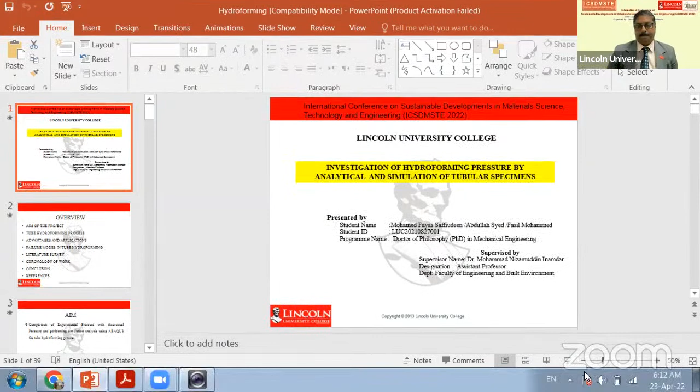The title of the paper is Investigation of Hydroforming Pressure by Analytical and Simulation of Tubular Specimen.

In this presentation overview, we are going to see what is the aim of this project, then the main title, tube hydroforming, what is tube hydroforming, its advantages and applications, and what are the failure modes. After that, literature review, then chronology of the works we have done: experimental calculation, theoretical calculation, and Abaqus analysis work, then conclusions.

So the main aim of the research is comparison of experimental pressure with theoretical pressure and to perform simulation using Abaqus software for a tube hydroforming process.

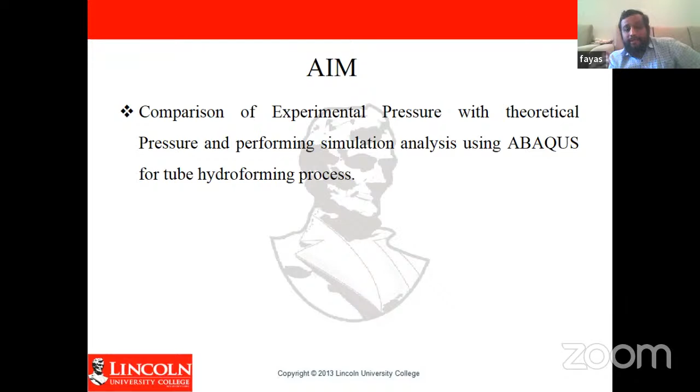This project is fully based on tube hydroforming. We did tube hydroforming for 3 different types of materials. We manually calculated the theoretical pressure using formula, then we did experimentation, then we did simulation, and we compared all these 3 pressures.

The objective of the research is comparing the theoretical and experimental pressure of deforming of components, and to carry out the analysis of the tube hydroforming process in Abaqus. This hydroforming is only for tube, not flat materials, only circular tube materials. We are also investigating the axial displacement of the tubular materials. After that, we did annealing also, and a comparative study of normal and annealed tube materials. We compared 3 materials: aluminum, brass, and copper.

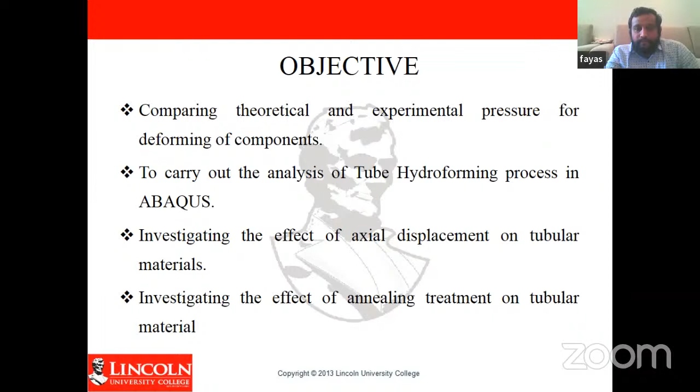This is the simple definition for hydroforming: it's a method of deforming sheet metals and tubular materials with the help of pressurized fluid medium. We will get the bulged material using closed dies. This is the simple process.

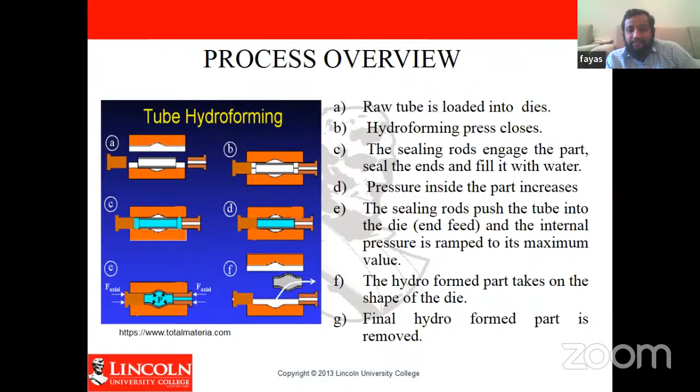For example, in picture A, the raw tube material is loaded into the dies. Then we close the press, the sealing rod is engaged, and the pressure inside the fluid medium was water. Once we give the axial displacement, that means pressure, we get the hydroformed components.

What is the advantage of this hydroforming? The important thing is there will be no welding activity to get the bulge material, so there will be no NDT and no defects. This is mainly for lightweight construction, and there will be no tool cost. Flexibility will increase, and different types of shapes can be created. Not only bulge material — this project creates only bulge material — but depending upon the die, we can create as many shapes.

These are some applications of tube hydroforming. It is mainly used in automobile and aerospace industries, more than that, bicycle frames, metallic bellows, some local components like elbow, T, and piping components — some companies are producing these.

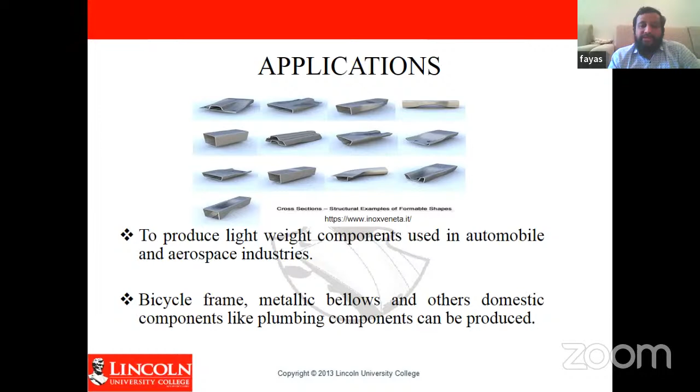These are all the general failure modes: bursting, wrinkling, buckling, folding back. Bursting happens due to excessive circumferential stress, and wrinkling happens due to axial compressive stress from end feed.

Buckling happens only at the initial point, the starting of the operation, due to high force. If you cannot directly give high force, we give step-by-step pressure; if you apply more force, you will get buckling. Then folding back happens after wrinkling — they combine together. If you apply excessive axial load, you get wrinkling, and after that you get folding back.

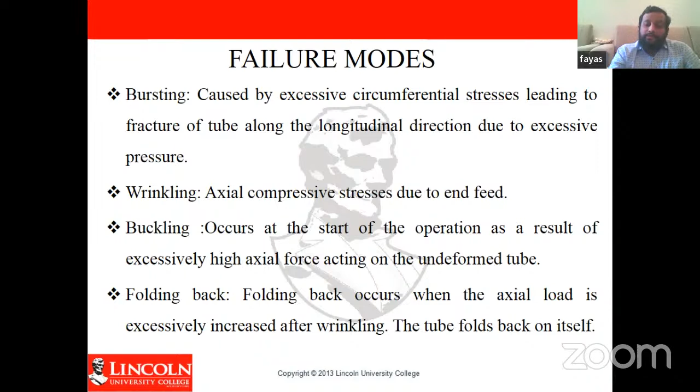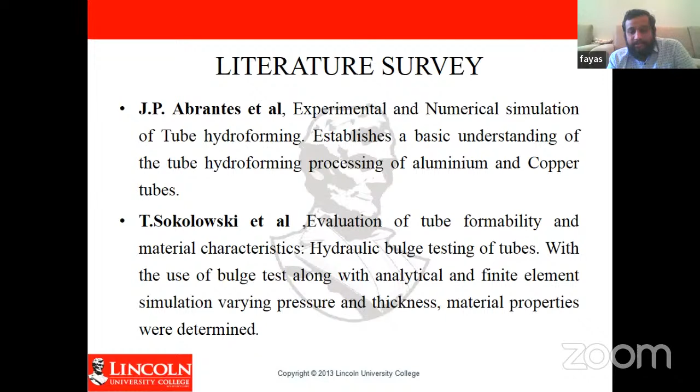These are the literature review. The first paper, by J.P. Abrantes et al., compared experimental and numerical simulation of hydroforming for aluminum and copper. The second paper evaluated tube formability using a bulge test — that's the only difference, and he didn't do experimental pressure, only analytical and finite element simulations. The third paper discussed a single-step tube hydroforming process, not multi-step.

The fourth paper, done by one of my colleagues, did tube hydroforming followed by annealing. The annealing temperatures for aluminum, brass, and copper were 413, 540, and 520 respectively. We have also taken the same temperatures for our project.

The last paper used finite element modeling and finite element analysis only in ANSYS. But the important thing he did was simulation in 5 bases — depending on how much pressure was given, he did multi-stage deformation. That's the important thing in this one.

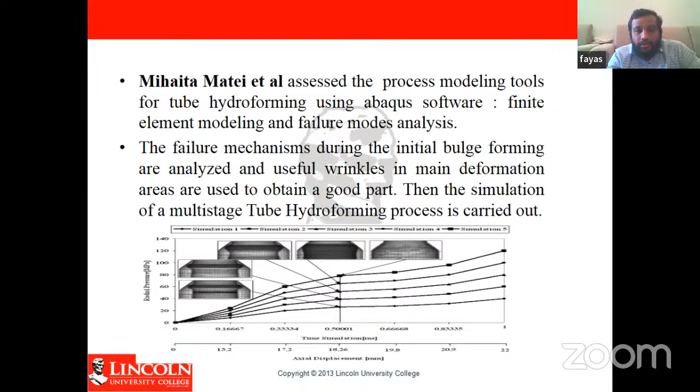The seventh paper described design and development of hydroforming for a long SUV frame. The next paper, by Ahmetoglu et al., summarized work using low carbon steel and aluminum alloys. The last paper presented theoretical analysis and numerical simulation to avoid wrinkling behavior — only that one defect was analyzed, focusing on how to control and use wrinkles.

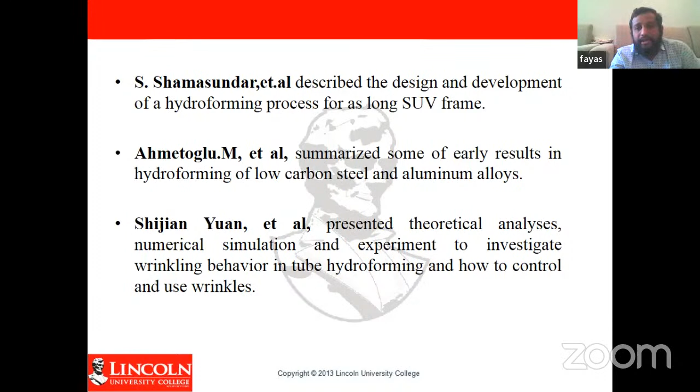So the first step of the process is calculation of theoretical pressure.

This is the formula. The important point is we have to find the strength coefficient K and strain hardening exponent N. The formula is: stress equals strength coefficient times true strain to the power N. The N value we will get from the stress strain curve.

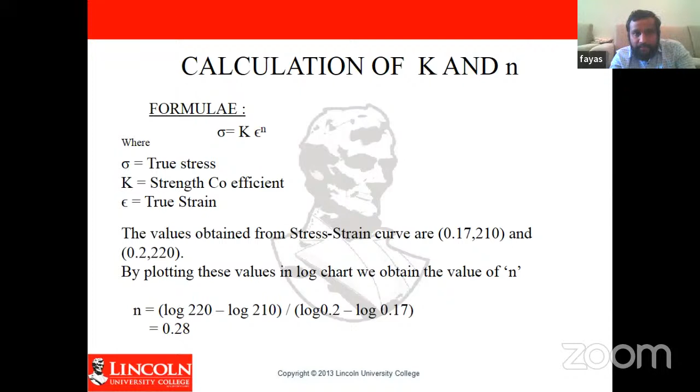This is the calculation for aluminum. We have given detailed calculation only for aluminum. So for aluminum, we got theoretical pressure as 13.6 Newton per millimeter square.

The same formula is applicable to brass, only the numbers vary. For brass, we got theoretical pressure 23.78. For copper, we got 25.64. This is only for theoretical pressure.

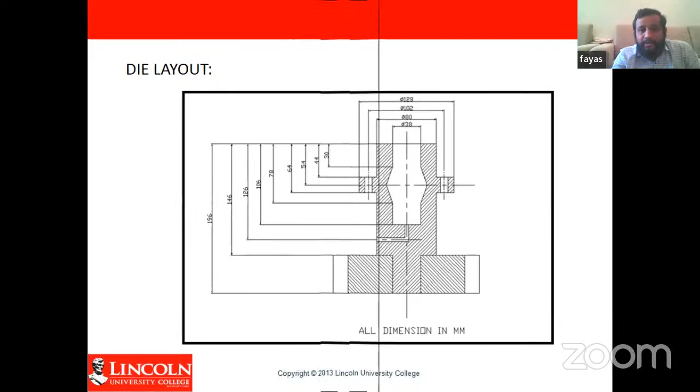So the specimen is brass. What we have done is this is the top die and bottom die. Inside this one, we will control the pressure and extrusion.

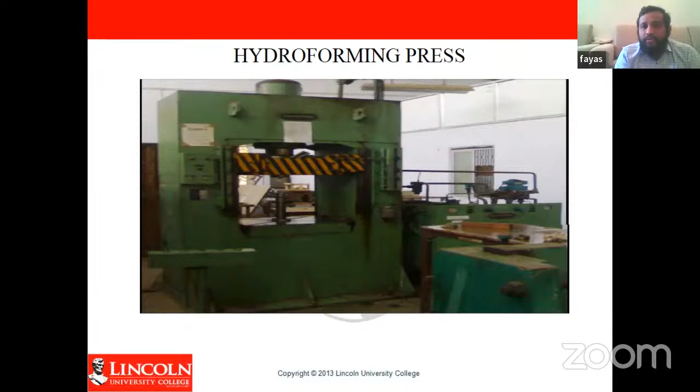Continuing, this is the hydroforming process. We changed the tool setup, same as what we have shown. From this setup we did the process. Our diameter of the tube is 38 millimeter, thickness is 1.5 mm. First we did a trial at 30 millimeter feed.

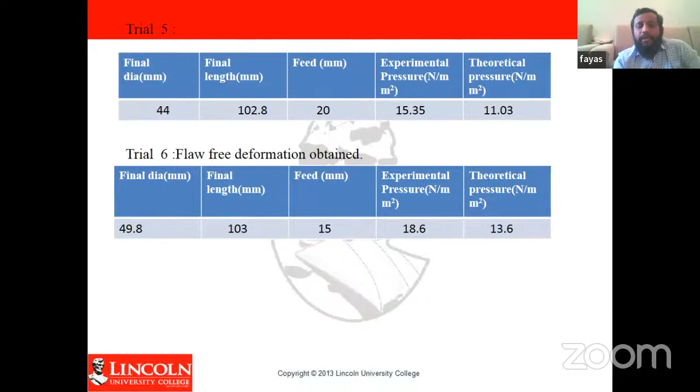Trial 1 failed. Trial 2, trial 3, trial 4, each time we changed different feed: 30, then 25, then 20, and 15. At final, we got it at 15 feed, a flaw-free result without any crack or buckling. We got it in trial 6.

Then for brass, we got it at 20 millimeter feed, at trial 2. Copper also we got at 20 millimeter feed, at the second trial.

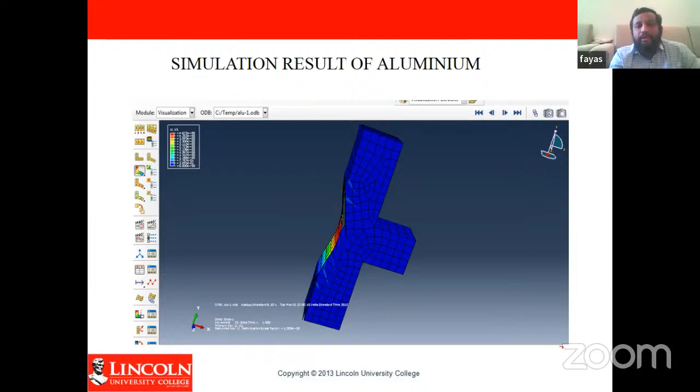Then this is a simulation thing, we did it in Abaqus. We did all the pre-processing and post-processing. This is only the final results of aluminum, brass, and copper. We noted down the value. This is the experiment results for aluminum, brass, and copper.

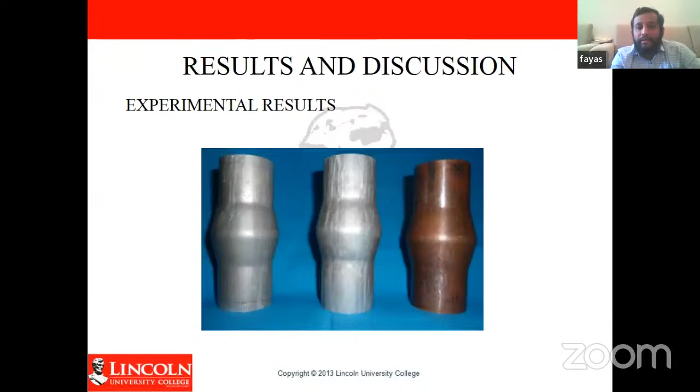Abaqus result is 23, 30, 35. Experimental result is 18, 23, and 21. So all the numerical simulation was conducted in Abaqus and compared with theoretical, and all are quite reliable.

Then for annealing, we did annealing as noted in the literature of the paper: 470, 520, 540 degrees Celsius. The specimen shows good deformability compared to without heat treatment.

So the conclusion of the project is theoretical pressure was evaluated and compared to experimental pressure. Brass is closer to copper, and the pressure developed for the required bulge is highest for brass compared to copper and aluminum.

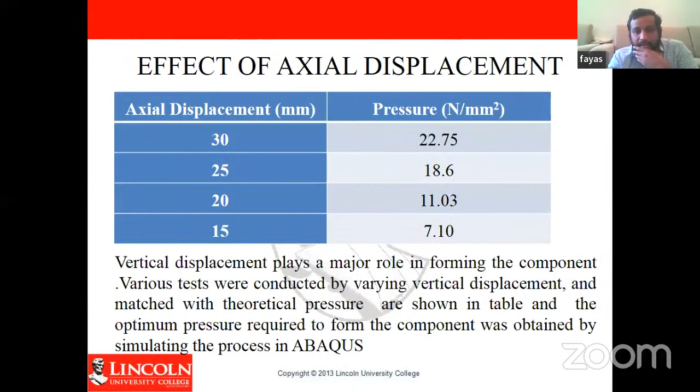If you see the numbers, brass is the highest one, 30 Newton per millimeter. For everything, all three materials, brass is the highest number.

Then the influence of annealing improves the formability of the tubular materials. And axial displacement of the punch increase helps the formability of the components. Bulging diameter obtained from experiment results and simulation analysis are almost closer.

So these are all the references.

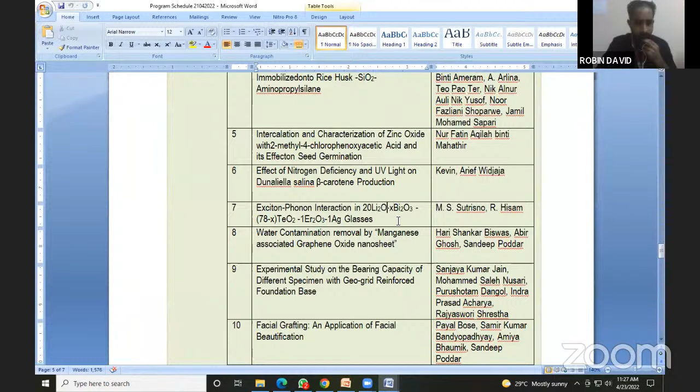So can I share my slide? Yes, please. Wait. Just to inform, as there are 5 missing, we are bringing some post-lunch session papers before this. Does that be clear? Ready as per I gave the chat box. Does it... yes, clear, your slide is visible. Okay, thank you, good, please. So then I can start. Good morning to all, to the chairperson, and also all audience. Today I will present on the exciton phonon interaction in lithium bismuth telluride erbium silver glasses. My name is Muhammad Siddiq Fadil bin Sutrisno from the University Technology Mara.

So this is the content. First we will go on the introduction, methodology, result discussion, and also conclusion. For the introduction, first is regarding the exciton phonon coupling. This is in the area of semiconductors, so we have the term band gap. For the electronic excitation to excite from the valence band to conduction band, we have some factors that assist the electronic excitation. One of them is the formation of electron hole pair formation that we call an exciton, bounded between the band gap. Example here, you can see the exciton, it is bounded between the band gap. So whenever it is bounded and trapped by the band gap, we need some energy transfer that can make it come out from the trapped condition. So what can help this exciton to get out from its bounded state? It is the phonon.

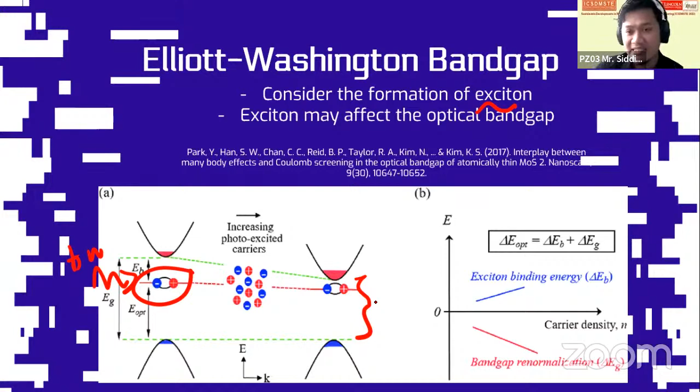So from our research, we get the same, actually consistent, same energy that is also consistent with the previous reported literature.

Increasing of disorderness parameter actually indicates increase in disorderness of the glass network. Whenever the disorderness of the glass - we know glass is famous for its disorderness - so it is due to the role of bismuth as glass modifier that will create the defect.

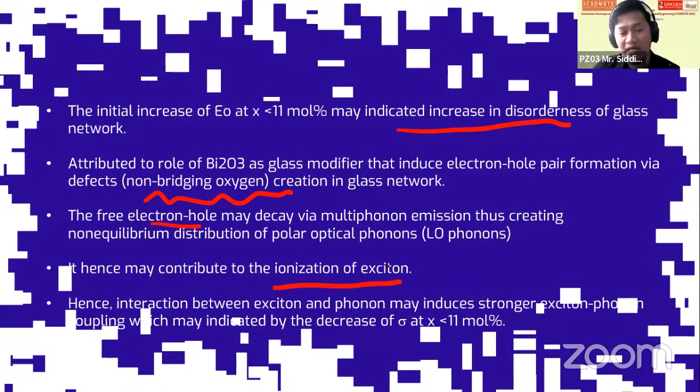So whenever we have a defect, then it will create a free electron hole formation. The free electron hole formation will decay via multi-phonon emission. The multi-phonon emission will help the ionization of exciton. So whenever the exciton is ionized, then we can have the strong exciton phonon coupling at this region.

So you can see from here, whenever the exciton phonon coupling is increasing and we have the strong exciton phonon coupling at the region before 11 mol%, we can say that we can also have the reducement, the decrease in terms of energy band gap.

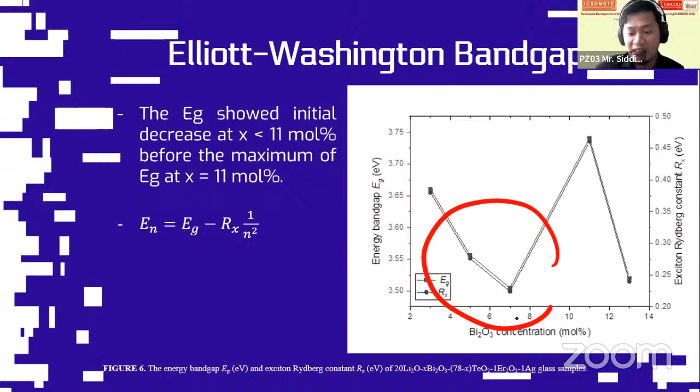So from this we can conclude that actually the exciton phonon coupling, whenever we have the strong exciton phonon coupling at some position, then it can help also reduce the energy band gap. So it is actually good news to us because we can find one way to reduce the band gap of a material, especially in the glass field.

So you can see from here that the reducement in terms of band gap is actually coincided with decrease in exciton binding energy. So it actually indicates the easier dissociation of exciton, or ionization of exciton. It is from the energy transfer from the multi-phonon.

So the energy that the exciton gets from the phonon will help the dissociation of exciton overcome its binding energy. Then the exciton will assist the electron excitation as a free carrier, thereby reducing the energy band gap. So then it needs lower energy only to do the electron excitation from the valence band to the conduction band.

So in conclusion, you can see from here, first we do our glass sample and examine its optical absorption properties, and then we calculate its disorderness parameter for all glass samples. And then after that we also analyze our absorption coefficient data by using the Elliott-Washington model, because this model considers the electron hole formation, the formation of exciton, and also the exciton phonon coupling in our optical band gap determination.

So, and we can get also the result. So that's the end of my presentation. Thank you.

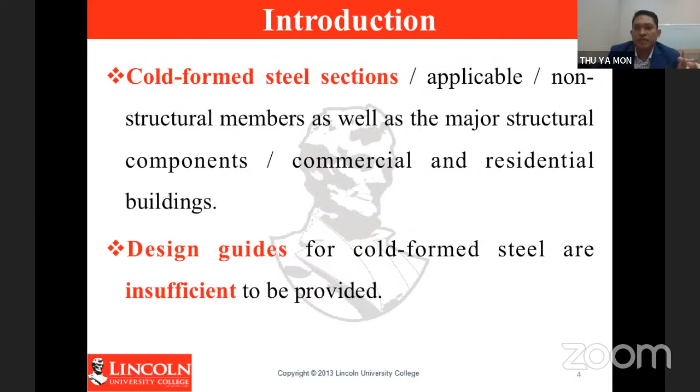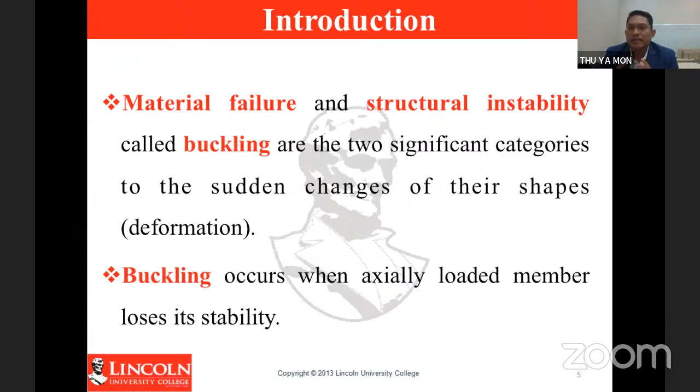The sudden changes of cold-formed members are called deformations, which have two influencing factors: material failure and buckling. Buckling means when an axially loaded member loses stability, and it generally occurs within the elastic range of the materials.

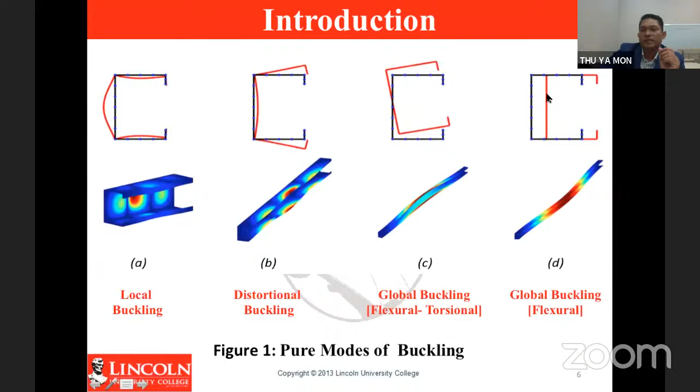In figure C, both rotation and translation of the whole member occur, which is called flexural-torsional buckling. In figure D, we see only translation of the member, called flexural buckling. The main purpose of this study is to investigate the buckling behaviors and bolt-welded connections of the back-to-back built-up built-up stud columns.

Stud column means short columns, and a compression test. For this purpose, I used 18 specimens in two groups: group A and group B. In group A, I used 9 specimens with end plates, and in group B, I used 9 specimens without end plates.

In section 2, experiment investigation, figure 2 shows the geometry of the specimens used in my experiments. On my left side is a specimen from group A with end plate, and on my right side is a specimen from group B without end plate.

Here we can see the red color, representing the welded joint connection of the back-to-back built-up column. There are 3 types of weld spacings: 509.6 millimeters, 204.8 millimeters, and 77.4 millimeters.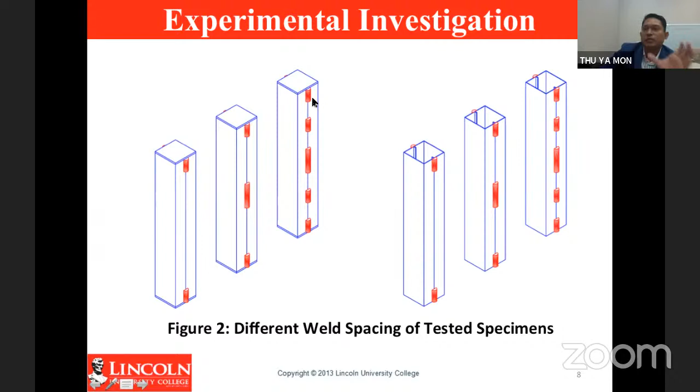Based on this, I focus on which welding type connection will be best for the back-to-back built-up connection, and what will be their buckling mode.

So for section 3, the test procedure and results. In my experiments, I have used a universal testing machine with a maximum compressive load of 1,000 kilonewtons. The testing procedure and method are according to ISO 6892 / JIS Z2248.

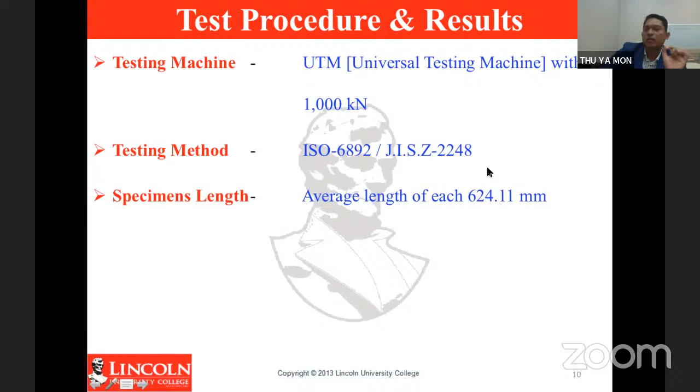For the fabrication of the tested specimen, because of geometric imperfection, the average length of the tested specimen is 624.11 millimeters. The specimens are welded using arc welding, jointed face-to-face with fillet weld connections. The weld spacing, as mentioned before, ranges from 77.4 millimeter to 509.6 millimeter. The welded electrode used is J3812 E6013, at room temperature.

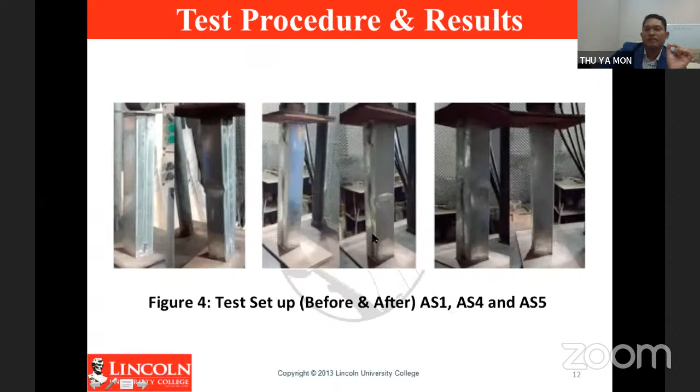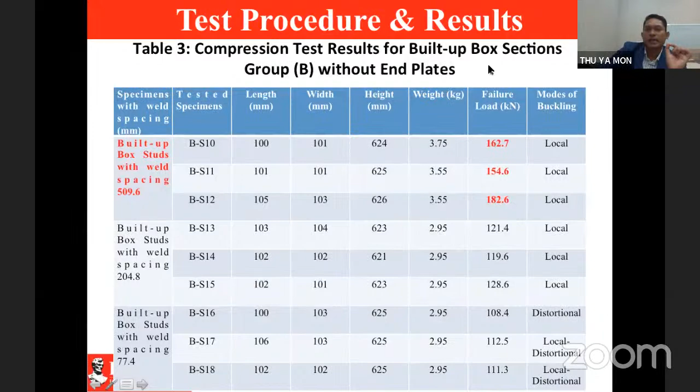For section 4, discussion: based on my experiment, the weld spacing of 509.6 millimeter sustained the largest failure load of 180.4 kilonewtons in group A and 166.63 kilonewton in group B.

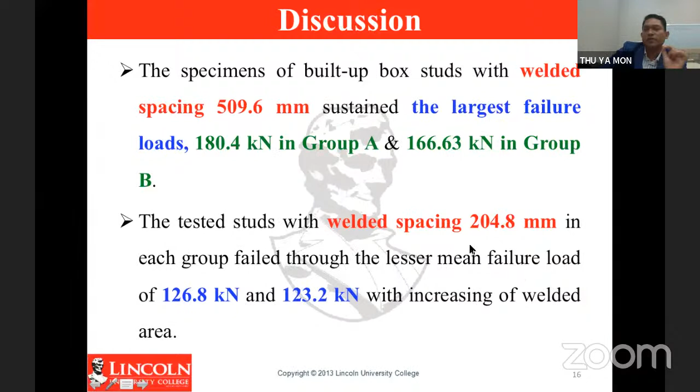Once the weld spacing decreased from 509.6 millimeter to 204.8 millimeter, we can see changes in the failure load, ranging from 180.4 kilonewton to 126.8 kilonewton in group A, and 166.63 kilonewton to 123.2 kilonewton in group B. This shows that decreasing the weld spacing reduced the failure load.

From this experiment, it demonstrates that the best weld connection spacing for the built-up box is 509.6 millimeter, and it is recommended that unnecessary welded area reduces the strength for bearing load capacity.

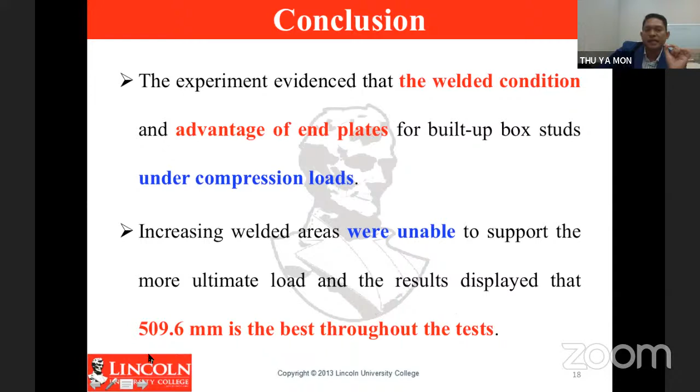For conclusions, this experiment shows evidence that welded connections and the use of end plates provide advantages for the built-up box column under compression loads. Also, the increase in weld area was unable to support more ultimate load, and the results show that 509.6 millimeter is the best spacing of the test.

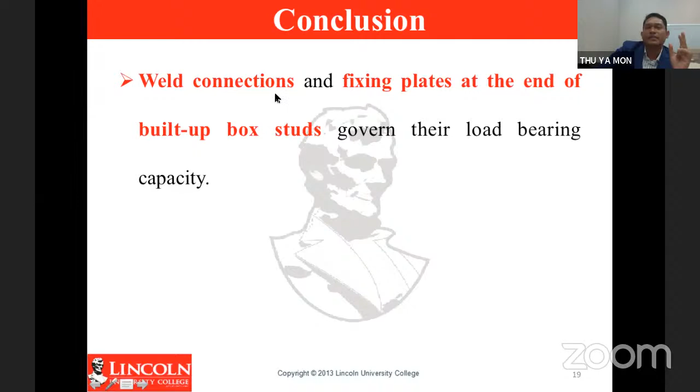These experiments demonstrate two factors that govern load bearing capacity: welded connections and the application of fixing plates at the ends of the built-up box studs. Throughout the experiment, there was no occurrence of overall or global buckling mode. Finally, it is recommended to use these experiment results together with analytical and numerical approaches to be more reliable in design evaluation.

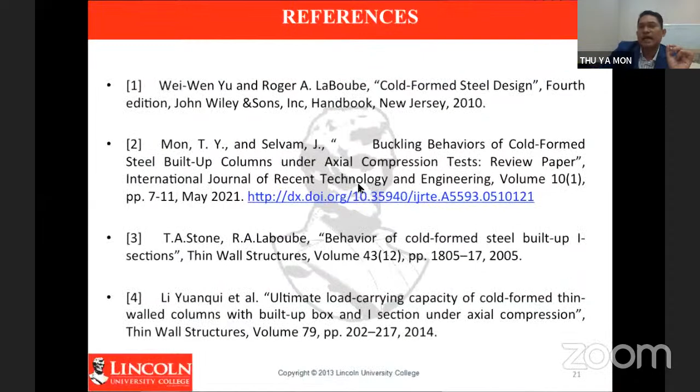Thank you, sir, for your excellent presentation. Carry on, okay ma'am. Any queries from the participant side?

So I have one concern: what is the need to study this buckling behavior of the materials? Why exactly are you studying about it?

Because in the construction industry, cold-formed steel members are used only as non-structural members. But in future, we hope to use this material in place of structural members. If we can substitute this material in place of hot rolled steel members, there are many advantages for the environment, for construction technologies, and also for construction costs. That's why we are focusing on how to use this member as structural components, like beams and columns, in building construction.

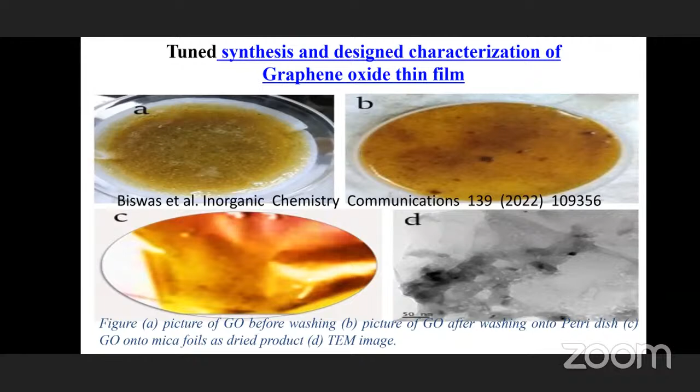Picture A is the raw picture of graphene oxide before washing by ethanol, and picture B is after washing on the petri dish, and C is the dried condition product on mica foil. Picture D is the TEM image of the graphene oxide.

This graphene oxide we have applied for removal of some heavy metal ions like copper, cadmium, nickel, chromium, etc. And we have got good results for the removal of heavy metal ions. From this chart, we have seen that the percent removal of copper is 74% from the wastewater. So our graphene oxide can be used for removal of heavy metal ions, but it is selective for our case because we did not perform this experiment for all types of heavy metals.

We only performed on these 4 metals, and in the next stage, our future plan is to study the other heavy metals. So for these 4 metals, we have already seen that 74% of copper 2+ ions can be removed by this graphene oxide, and 62% cadmium 2+ can be removed, and nickel is only 24%, and chromium is only 8%. So copper has a higher percentage that we can remove by this graphene oxide. So for other heavy metals in the future, we will study.

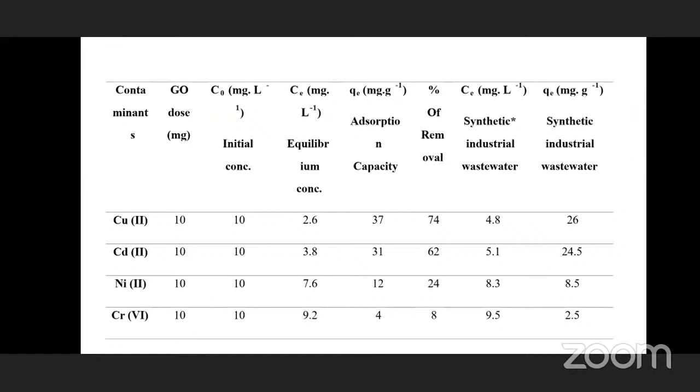And this is the graph for the removal of heavy metal ions. That's the adsorption isotherm experiment data.

And what is the mechanism? The mechanism of the removal is that if we see, this is the graphene oxide, and if this is the metal ion solution, then if we introduce the graphene oxide into this metal ion solution, then, from the batch method, the metal ion just gets absorbed on the graphene oxide side. And how does the graphene oxide absorb this type of metal?

I'm showing this here. This is the graphene oxide structure. This tentative structure is this - it's a tentative structure because there is a different type of sheet, maybe like this, hexagonal, maybe there's some sp2, some sp3 carbon atoms also. There are so many groups.

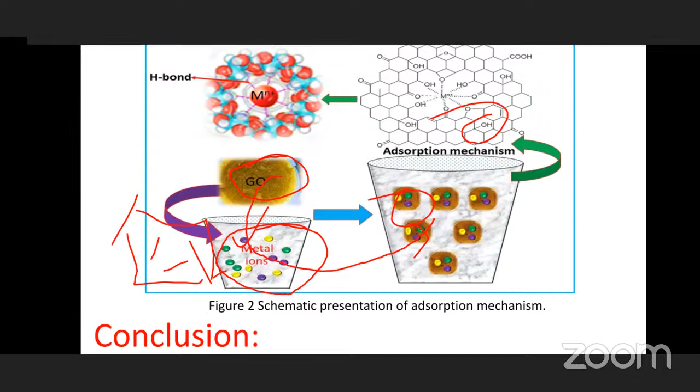That means OH group, alcoholic group, acidic group, aldehyde and ketone groups are also there. So through the OH group or keto group or aldehyde group, metal ions like copper 2 plus or 3 plus, lead 2 plus, these types of metals, we can absorb by the graphene oxide. So there is an OH group, and the OH group contains a lone pair, or any oxygen containing group has a lone pair. This lone pair can act as the negative side and the metal ion is the positive side. So it can form a coordinate bond, or this is the attraction that's adsorbed through interionic or dipolar attraction. So it can form a hydrogen bond like this.

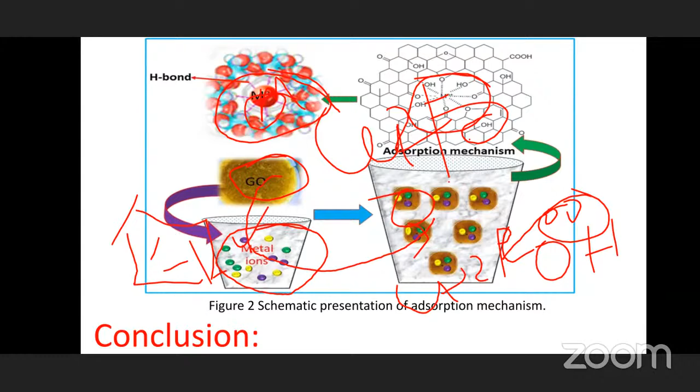So here it is shown that if there is a metal ion, this metal ion can be trapped by the graphene oxide. So this is our study in this paper. And what is the conclusion? The conclusion is that we can remove such types of metal ions like copper and cadmium from the wastewater, and our wastewater was synthetic wastewater. That means we just made the solution of metal ions, but it is not field work. In the near future we'll do the field work because this is a good result, so we can remove the metal ion from the industrial water.

And this is the acknowledgement, and there are so many references there. Thank you.

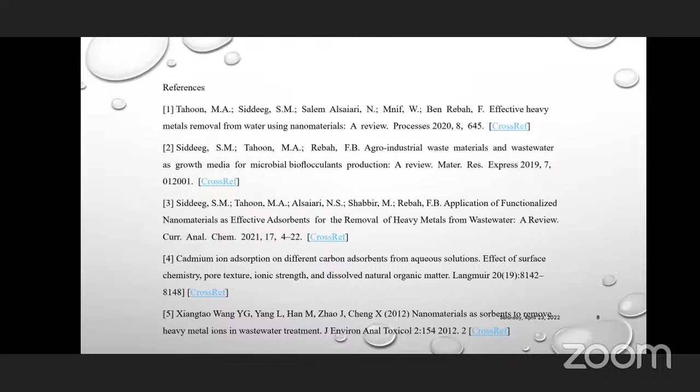Thank you, sir. Hello, thank you for your presentation. Yes, thanks. Is there any question, sir? Any questions please from the participant side? I think I have a question. Yes, sir, you can continue. Then I'll ask. No, you ask the question.

Okay, so I have a concern: can it be commercialized? What is the cost of it? Because it is a good problem statement you have selected. So what is the cost? Can it be commercialized?

Yes, ma'am. Actually, the graphene oxide by Hummers method is easily synthesized. It is cost effective, so economically we can use this type of material because it is not graphene, it is graphene oxide. So we can readily prepare it.

Okay, so does graphene oxide itself have some bad impact on health? Have you studied about it?

Graphene oxide, it depends on the method of preparation. If we use potassium nitrate, then it is very dangerous because of nitrate ions and potassium ions. So if we can remove this type of metal or this type of ion from the graphene oxide, then it will be more effective for our health. So we used an alcoholic solution, and again and again if we centrifuge this, then most of the metals and this type of dangerous gas is removed. So our graphene oxide is safe.

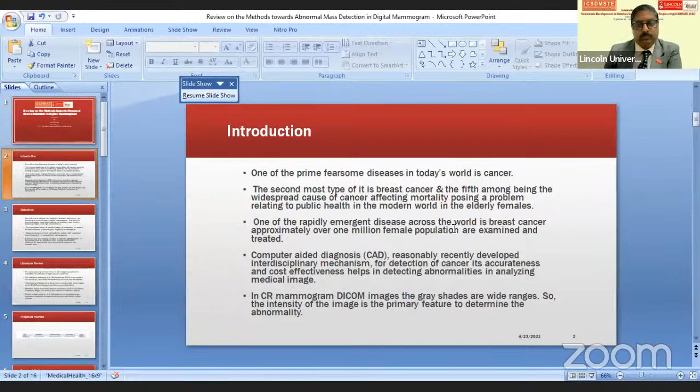So to introduce on cancer, as I said, it is one of the fearsome diseases, and among female elderly women affecting worldwide population of 1 million. So our study that we are going to present today is on CAD, computer aided diagnosis, which is a recently developed interdisciplinary mechanism.

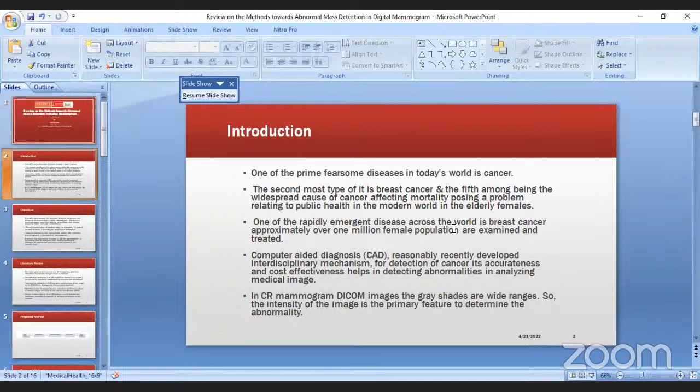Why are we calling it interdisciplinary? Because it involves different studies of medical imaging, computer science, and artificial intelligence, which we have used in this study for detection of cancer and to calculate its accurateness. It is also one of the cost effective methods helping medical practitioners all over the world in detection of abnormalities and in analyzing the medical image. So it's one step further helping medical practitioners towards detection.

In computer radiography, CR mammogram DICOM images, we have studied the grayscale images, which have a wide range of grayscale shades. So the intensity of the image is the primary feature to determine the abnormality. There are different colors present in any medical image, but we have tried to convert it into a grayscale image and then bring it down to the most intense value of color in the image, and that way we tried to detect it.

So one of our objectives is one of the best methods for detection of breast malignancy and discovery at the nascent stage. So when a person is suffering from this kind of disease, at an early stage in digital mammography, we can catch the disease and try to detect and cure it as soon as possible. It poses excellent image quality and has huge intensity resolution that enables preparing these images with high computation rate.

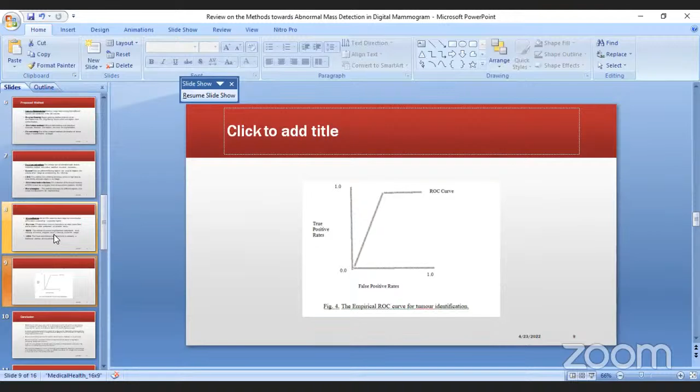So that comes to the end of this method of review process for detection.

To conclude, this is one of the modernized techniques achieved in computation and telecommunication, because it has a wide range of equipment available and utilized, which supports medical images or mammogram images. As I mentioned, it's an interdisciplinary subject involving computer science, medical science, as well as artificial intelligence, with some portion of statistics used.

So limited emphasis has been placed on analyzing the diagnostic process used by the mammogram to reach a diagnosis. This way we can improve diagnostic performance as well. This method also has the potential for future studies because of its simplicity and cost effectiveness.

This method also motivates online and real-time breast cancer diagnosis. We put the medical image into a system, identify the intensity values, and then come to a final conclusion. So this is an online or real-time system.

This can also be difficult sometimes, to decide who may have breast cancer or who may not. That's one of the problems or challenges we are still trying to overcome.

But to a major extent, we have found that it does determine the sensitivity, the specificity, the accurateness. It can be found from any medical image, and the majority focuses on either enabling the mammogram cases for examination and diagnosis, or future diagnosis purposes. So this provides an archive of material to be referenced as time progresses.

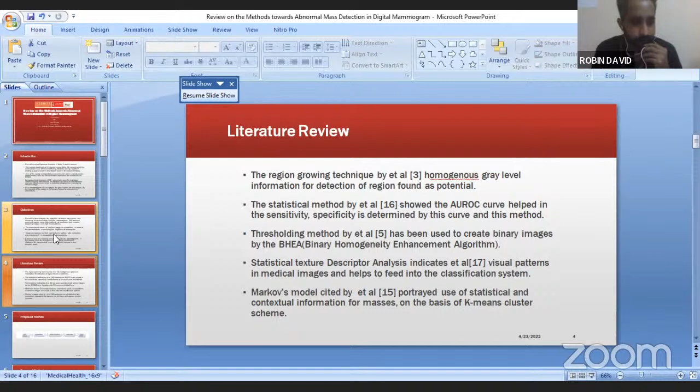What are the challenges in traditional methods for imaging of breast cancer? Traditional methods? What are the challenges you face in traditional methods? Your voice is breaking. What are the challenges you face in...

What are the challenges we faced? Yes sir, okay, yeah, so in my method, or the traditional methods you're saying? The traditional methods, okay.

Sir, for the traditional methods, overhead cost increases and more time is taken. So these are some of the challenges which we tried to overcome in our modern methods of computer aided diagnosis.

Okay, thank you. Excuse me, professors, I presented yesterday from the business and management field. So can I ask a question? Sure, yeah, thank you, Professor Potter.

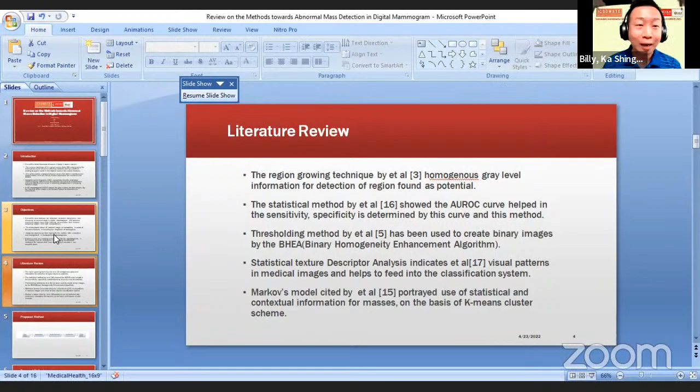Ms. Sangita, I appreciate a lot about this research topic, because even now, some of my friends got breast cancer. So according to your conclusion, I think this is very fruitful and also very useful. From your point of view, which part from your research findings do you find the most useful, and how can that useful part apply to the field, especially for breast cancer patients? Thank you so much.

So which part is useful, you're saying, out of this research work? Yes, definitely the classification, the last part, the classification and decision making process, where we finally conclude whether a patient actually needs diagnosis or not, or whether the tissue is malignant or normal tissue. So the concluding part. Okay, thank you so much.

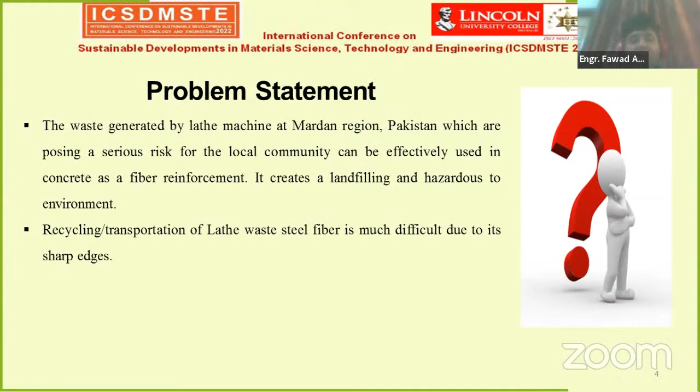The problem statement: the waste generated by lathe machines in the Mardan region, Pakistan, poses a serious risk for the local community, but can be effectively used in concrete as fiber reinforcement. It creates landfilling and hazard to the environment. Recycling and transportation cost of lathe waste is very high because it has sharp edges, and laborers get injured during transportation or dumping it at steel mills.

The research aim was to develop a new economic and environmentally friendly lathe waste steel fiber by analyzing the mechanical properties of concrete. The research objectives were to determine the mechanical properties, compressive and flexure strength of concrete — the two basic strengths of hardened concrete usually studied in civil engineering concrete technology — to analyze the optimum dosage concentration in newly developed lathe waste reinforced concrete, and to compare it with control concrete, meaning concrete without lathe waste.

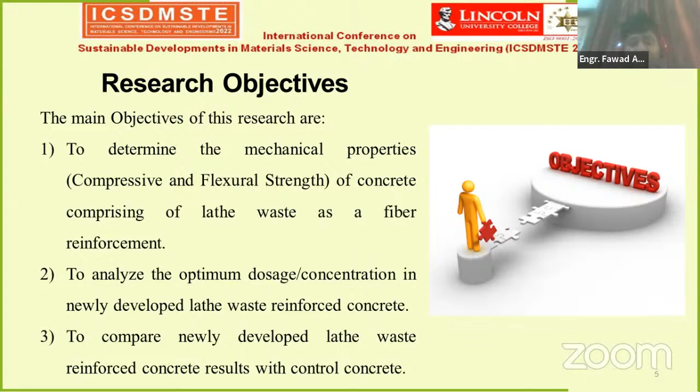What is the research gap? How is my research different from others? Lathe waste used in past research was obtained from different machine processes like drilling, boring, turning, and threading. But this research work consists of waste from the threading process of 3, 4, and 6 inch cast iron pipes used in deep wells, obtained from a local lathe machine workshop in Mardan.

My research methodology: first I studied the background to link my research with past studies, reviewing different research papers. The second step was experimental analysis. For this, I made concrete cylindrical samples and beam samples. The cylindrical samples were tested for compression, and the beam samples were tested for flexure strength. Then came result compilation — the universal testing machine was used for both compression and flexure tests.

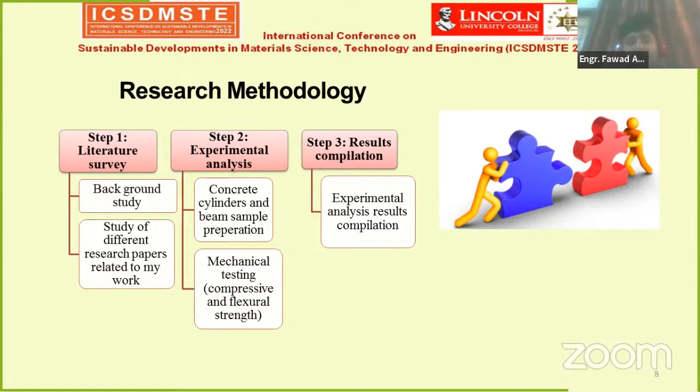The UTM only gave us the loads and stress-strain curves, but for the convenience of researchers, I converted these into strength values. I will explain how further on.

A total of 42 cylindrical samples were cast, with lathe waste fiber reinforcement percentages of 0.5, 1, 1.5, 2, 2.5, and 3% respectively. Why up to 3%? From past research papers, the optimum dosage was about 1.5 to 2%, so for more clarity I extended testing to 2.5 and 3%.

The tests were performed at 7, 14, and 28 days after curing age. On the right side, the sample size is shown, following American Society for Testing and Materials standard C192 — meaning I cast the samples as per ASTM American standards.

Now you can see these are the fibers which have been used in concrete, and these are the cast iron pipes which were used during lathing. The waste was generated from this process and then used in concrete. As I mentioned in previous slides, 2 cylindrical specimens were cast for the compressive test.

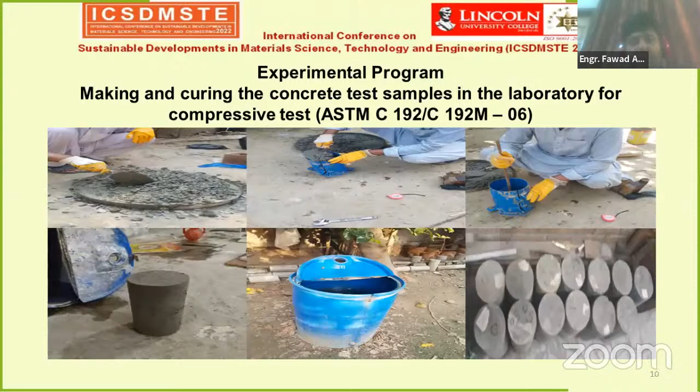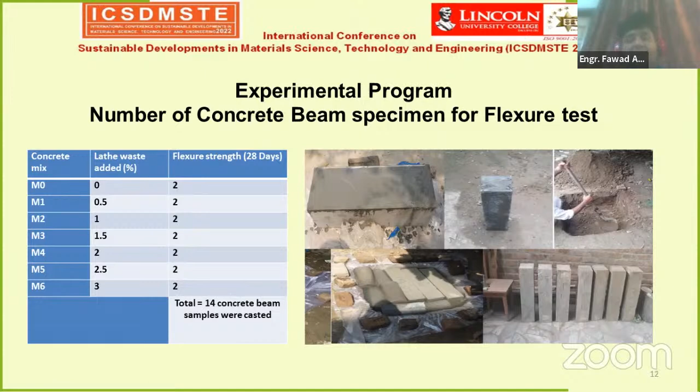Now, please focus on this slide. This is basically the conclusion of my experimental program.

Two types of tests were performed: compression test and flexure test. Compression tests were performed as per standard ASTM C39, and flexure test was performed as per ASTM C293. The compressive strength was found by the formula: maximum load divided by the cross-sectional area of the cylinder.

As I previously mentioned, for compressive strength I cast cylindrical specimens, and for flexure strength in the form of modulus of rupture, I cast beam specimens. So 42 cylinders were cast for compressive strength, and 14 beam specimens were cast for flexure strength.

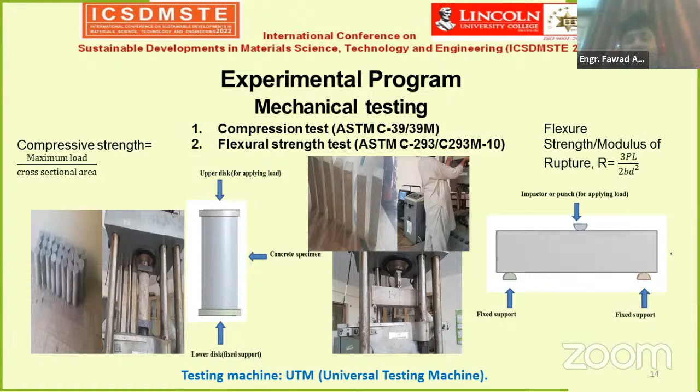The strength was increased due to the bridging capacity of the fibers. Lathe waste fiber creates a bridge between gravels and sand, and it bridges the composite and increases the strength.

The strength was increased only up to 2.5%. With further increase, the strength decreased.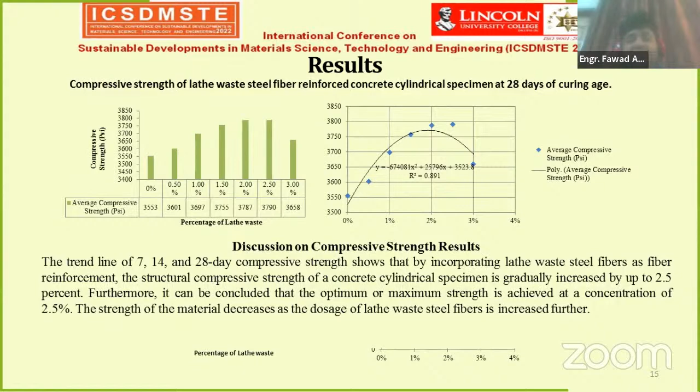This also shows that 2.5% is the optimum dosage of lathe waste steel fibers in concrete. After increasing beyond 2.5%, the strength gets decreased.

The conclusion of my research is that adding lathe machine scrap to concrete increases its compressive and flexure strength up to 2.5%. The study helps to develop a new eco-friendly concrete called lathe waste steel fiber reinforced concrete.

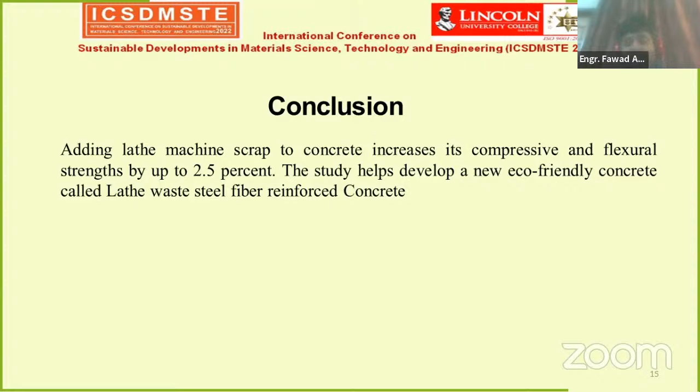Recommendation for strength enhancement: lathe waste can be used as fiber reinforcement up to 2.5%. If we don't want to change the cementitious property of concrete, 28 days of curing age is best for the experimentation program.

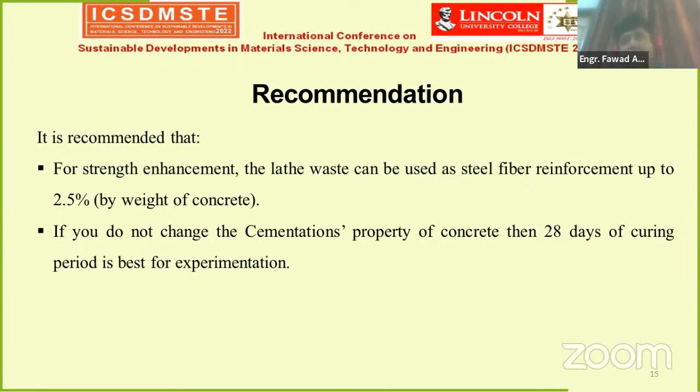Or simply we can say that 28 days, as per ASTM standard, is best for any experimentation of mechanical properties in civil engineering.

Now these are the pre-review comments of the conference, which I have incorporated into my research article. I will only open my research article to show that I have made all the changes as per the authors' and reviewers' remarks. Thank you for listening to me.

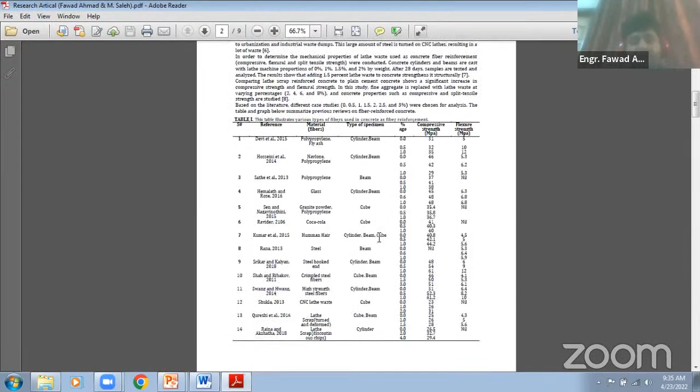Hello. Yes, yes. Sir, thank you for your excellent presentation, sir. Thank you. Thank you. Sir, I have some doubts.

What was the size of the fiber used? Is it micro size or macro? Sir, it was already mentioned. I didn't show what the size was, but the size varied because since this is waste, it doesn't have any appropriate size. So the size varied from 2 to 5 inches.

Okay sir, so in your opinion, 2.5 is the optimum? Yes, 2.5 is the optimum dosage for maximum strength. Okay, sir.

Okay sir, in the introduction you mentioned some other types of fibers, like polypropylene fiber, carbon nanofibers, etc., and their cost is high. Yes sir, they are not waste fibers; they are available in the market at a price. We buy them and then use them in concrete. And the lathe waste is available in bulk quantity in lathe shops.

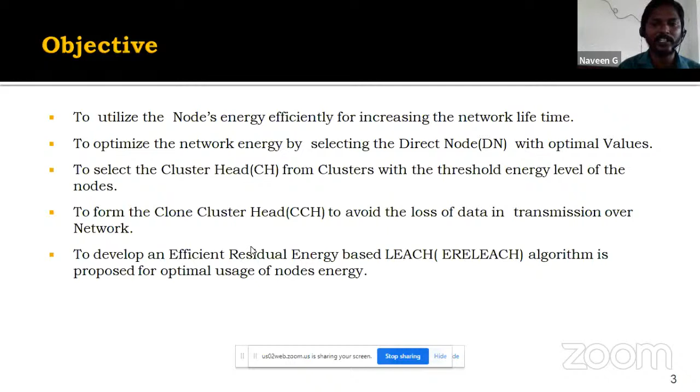In order to introduce these objectives, I have proposed an algorithm called Efficient Residual Energy based Leach Algorithm, short form ERELEACH. This is based upon the Leach algorithm.

The scope of this is simple: to form a cluster head, and to send data from the destination to the base station without any delay. The clone cluster head is formed to avoid loss of data. By doing this, the network lifetime can be increased immediately, and throughput, packet routing, and load of the cluster head can also be optimized using this algorithm.

These are the survey papers I referred to for my research. Energy efficient probabilistic routing algorithm - there they use the energy efficient probabilistic routing algorithm. In energy efficient routing algorithm for Internet of Things, they have used the RPL algorithm, routing protocol for low power and lossy networks. In the residual energy based cluster selection, they have used a hierarchical clustering algorithm.

And these are the papers. From these papers, I summarized the algorithms they used for routing. They have used different kinds of algorithms which extend the network lifetime of the nodes. All the existing algorithms increase the network lifetime of the nodes, and also reduce traffic, and the stability period of network performance is also optimized, and the residual energy is compared to get longer network time. The cluster head has been selected using a Leach algorithm, and clone algorithm was used

to establish a chain and for route detection only. The quality of the route and route selection among the nodes was made with optimal values, and lower packet loss rate and improved reliability was achieved in existing algorithms.

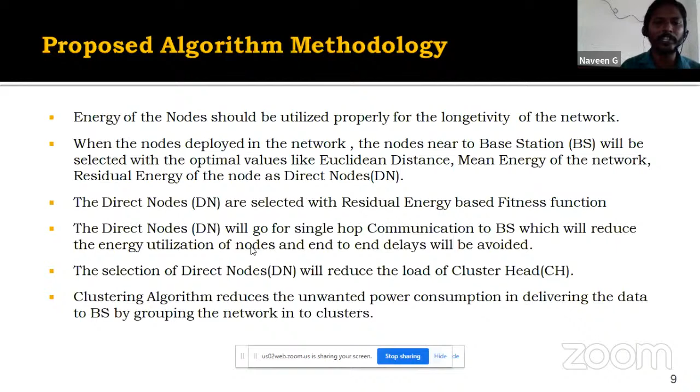This is the proposed algorithm methodology. By using optimal values like Euclidean distance, mean energy of the network, and residual energy of the nodes, we select the direct node, which sends data to the base station immediately. By using the direct node, the load of the cluster is reduced, because instead of many nodes sending data, only one node communicates with the base station. So the load of the cluster head automatically decreases, and the clustering algorithm reduces unwanted power consumption during data transmission to the base station by grouping the network into clusters.

Here is how the cluster head is chosen. It is chosen by balancing the load in the network, which reduces energy consumption and enhances the lifetime of the network. The cluster head is selected from the cluster nodes with optimal values, as I said earlier, with higher energy and residual energy. Cluster head selection happens every round, checking the higher energy level among nodes, and those nodes will be elected as cluster head by comparing the higher energy level. After the completion of each round, the CH will be elected, the elected node will act as CH, and non-selected nodes will act as non-CH member nodes.

These are the steps obtained for the clone cluster. The moderator asks the presenter to conclude due to time. The presenter acknowledges and asks for one more moment to finish.

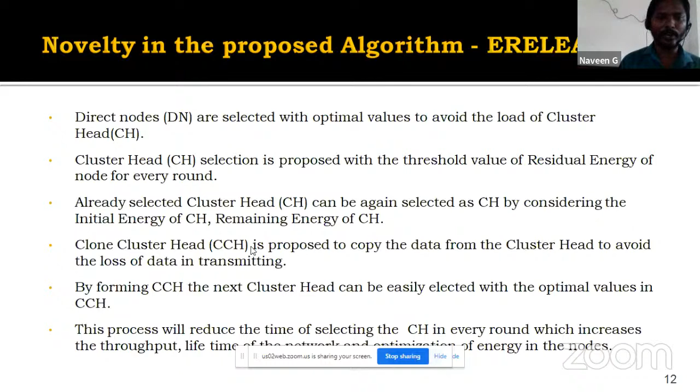The novelty of my proposed algorithm is, first, we elect the direct node; second, we select the cluster head using a threshold value; and we form a clone cluster head to copy the data from the cluster head. This is the novelty of my proposed algorithm, and these are the reference papers I referred to for proposing this algorithm. Thank you, sir.

Thank you for your excellent presentation. What are the parameters you consider while selecting the optimal path between source and destination for a routing protocol?

The parameters I have selected here are mainly residual energy as the main concept. The reason residual energy is important is that as nodes transmit, their energy levels decrease. So to capture the node's energy level, the main factor I consider is residual energy, what energy is available in particular nodes, and the selection happens according to that.

Okay sir, thank you, that's about my part. Thank you so much, sir.

Thank you madam, any question? Yes sir, I'm just asking, have you made any comparison with recent approaches? Madam, I'm still working on that. I just started this research in January only, so I'm collecting papers and data, but I haven't put it into a table or graph yet. I'm still working on this, madam.

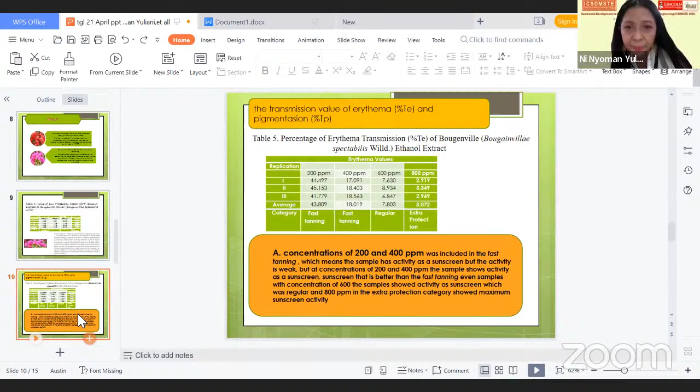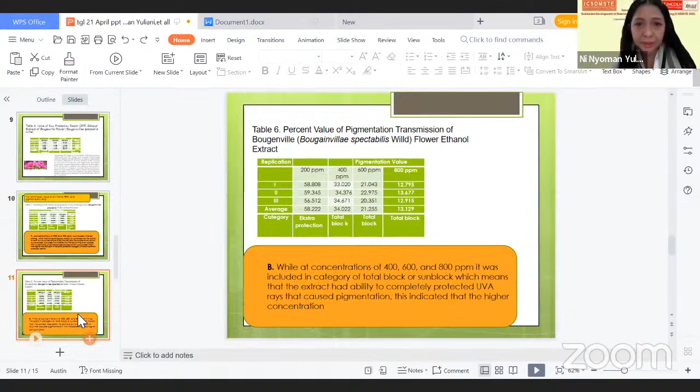Conclusion: bougainville ethanol extract has sunscreen activity. Bougainville ethanol extract contains flavonoid compounds, alkaloids, tannins, and phenolics.

Bougainville extract had SPF values at concentrations of 200, 400, 600, and 800 ppm. The percentage of erythema transmission at concentrations of 200, 400, 600, and 800 ppm was 3.072% respectively.

The percentage of pigmentation transmission at concentration 800 ppm was 13.129% respectively. Suggestion for further research: to make a sunscreen formula using bougainville flower ethanol extract, and to do fractionation with several solvents to get even better sunscreen ability. Reference. Thank you for your attention.

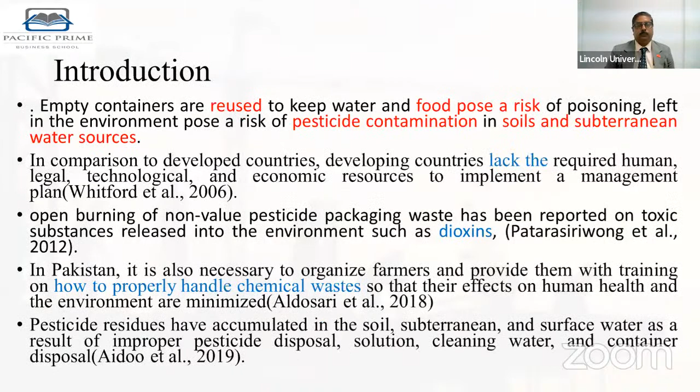May I invite any suggestions, comments, or questions? I have one suggestion, not a query. In your presentation, if you had included some kind of graphical representation, it would have been more interesting. You included only text and did not show any results. If you had included graphical representation, maybe country-wise or from different places in your own country, the presentation would have been more interesting.

Thank you. Robin, sir, if you have any queries? Yes sir, I have one. According to your opinion... sorry sir, I cannot hear your voice clearly because of vibration on the line. Let me check the chat for the question. Sir, could you suggest one application for recycling these pesticide containers?